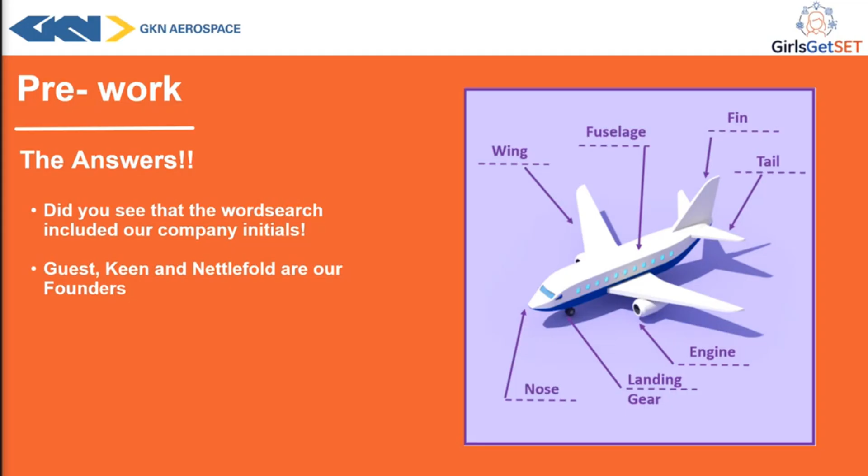So the pre-work, if you did that, there was a little word search and then just some labels to put on the plane. These are the answers, just some very basic breakdown. And in the word search, they included our company's initials. GKN stands for Guest, Keen and Nettlefold, who are our founders.

So we'll go on to what is aerospace engineering. Aerospace links to anything that flies, so this includes aeroplanes, rockets, satellites, and there are loads of different companies building these cool machines to explore the sky and space. Typically, not many people really know who GKN are, but you might have heard of bigger companies like Airbus and Boeing. GKN is just a supplier to them, but there are loads of different companies out there who work towards the same thing of getting power up in the air.

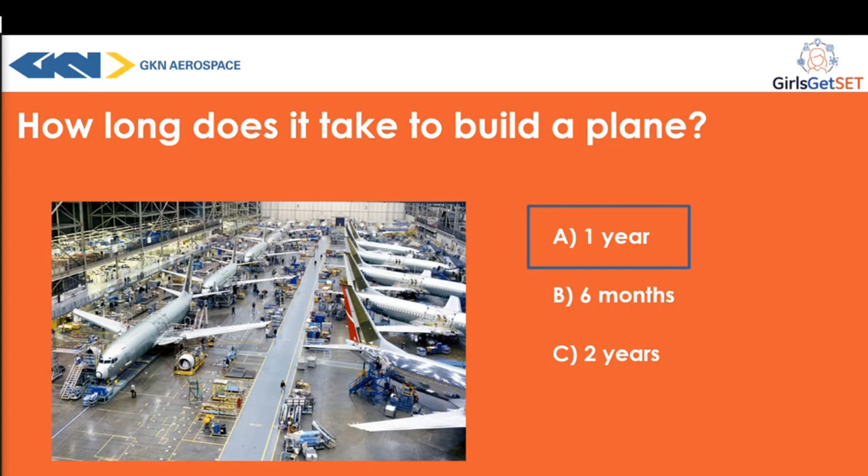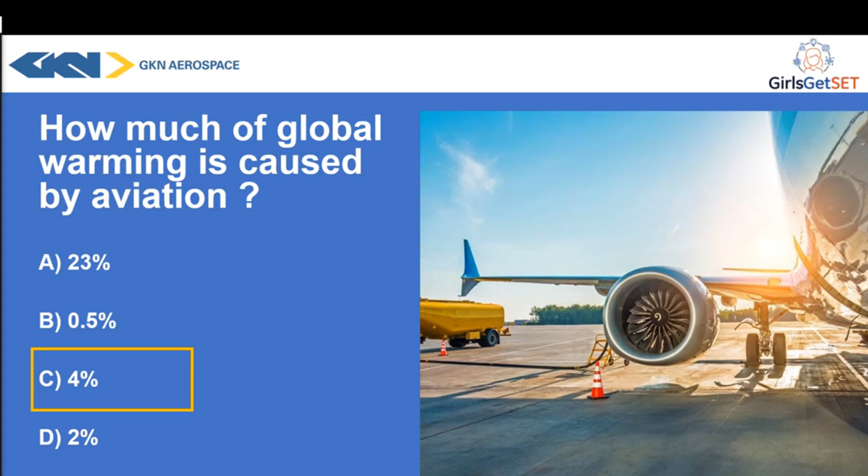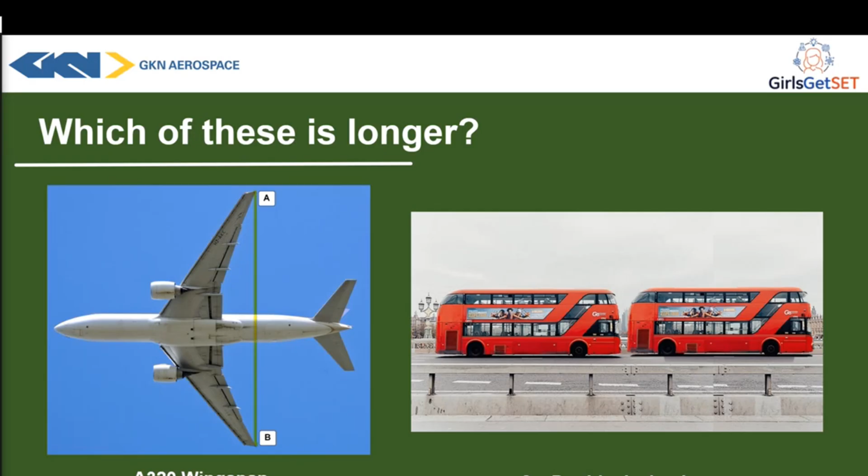Okay, next question: which of these do you think is longer, an A320 wingspan, like a small plane which may take you over to Spain or France on holiday, or two double-decker buses? Most of you are correct, the wingspan is longer by quite a bit. An A320 wingspan is about 34 meters, and two buses vary a little but are about 10 meters less. So it gives you a visual of how big these planes actually are.

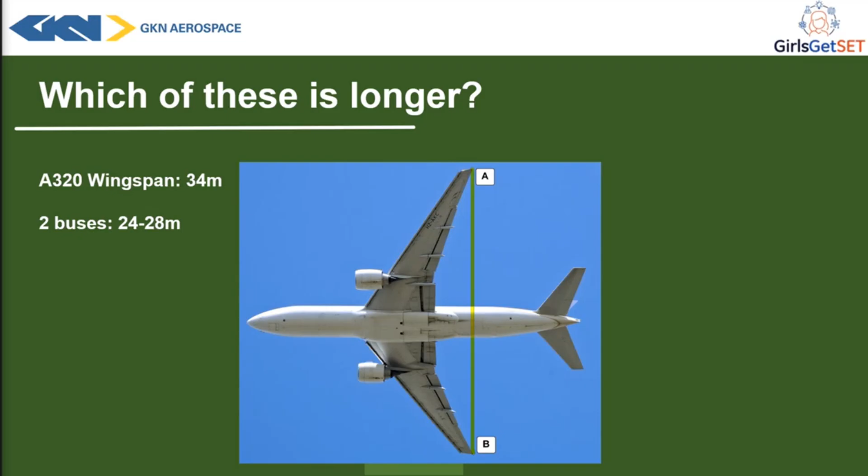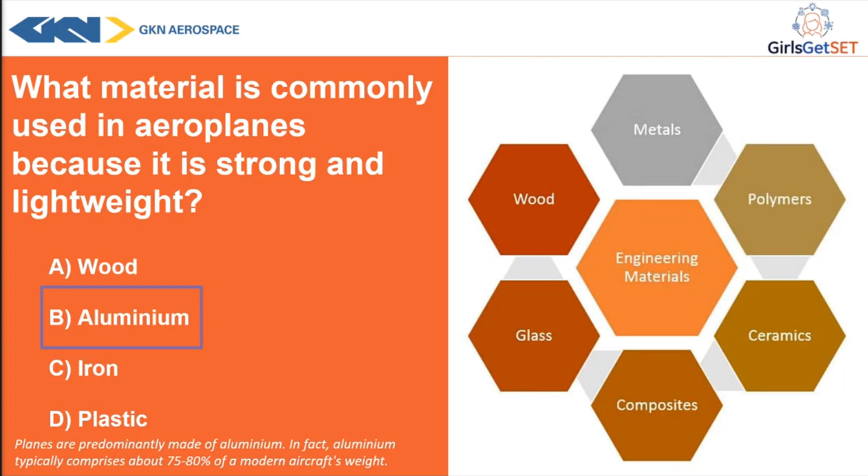So I'm Jen, a project manager here at GKN Aerospace, and I look at our manufacturing and future skills issues within the aerospace industry. One massive problem in the aerospace industry is CO2 emissions. As we all know, aircraft need fuel to fly, but currently these are fossil fuels or oil, which is found deep underground. When we burn this oil, it releases CO2 into the air. This ends up trapping heat, leading to climate change, and that's why scientists and engineers are looking for cleaner ways to fly planes.

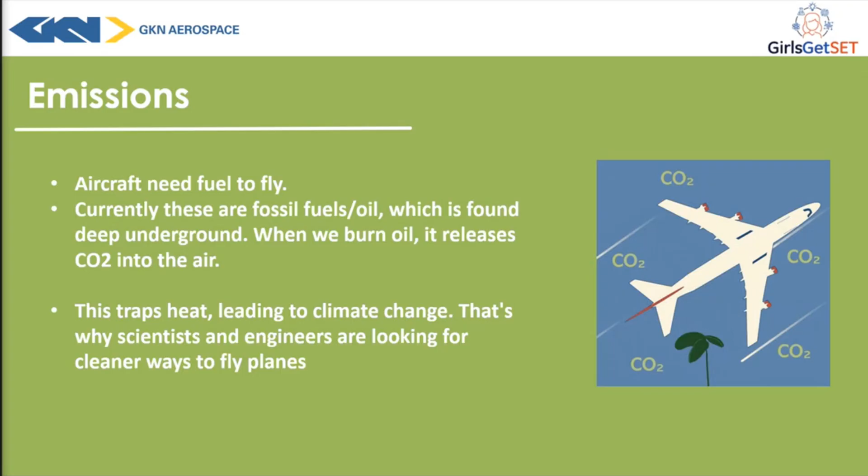So I do have some scary facts for you all about these emissions. 90% of aerospace emissions come from the aircraft still flying today, and one long-haul flight can produce more CO2 than the average person emits in a year. So that's only one holiday someone's taking from London to New York.

Emissions are not just CO2, so there are other harmful gases also contributing to global warming, and we see really bad pollution on these flight paths as well as around airports. Aviation emissions are the fastest growing sector, more than doubling between 1990 and 2019. Finally, since our first plane was built over 100 years ago, that means the planes today definitely need to change.

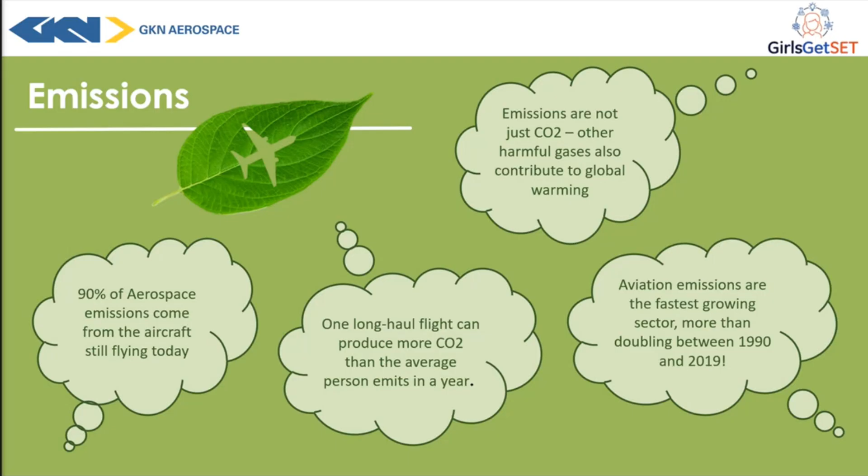So, what changes can we make to decarbonize aviation? We have three main options. The first one being electric, so battery powered, and this is really good for regional flights, flights within the UK. I think our limit for that plane would be to get us to the south of France. So we definitely need to develop more battery power.

Our second option is hydrogen, and this is best for trips like Europe from here. We are still developing that and the infrastructure to support hydrogen flight. Thirdly, there is SAF, which stands for Sustainable Aviation Fuels, likely the best long-term solution for medium to long range flights. In 2023, we actually managed a 100% SAF flight from London to New York, so hopefully we can get to Australia at some point.

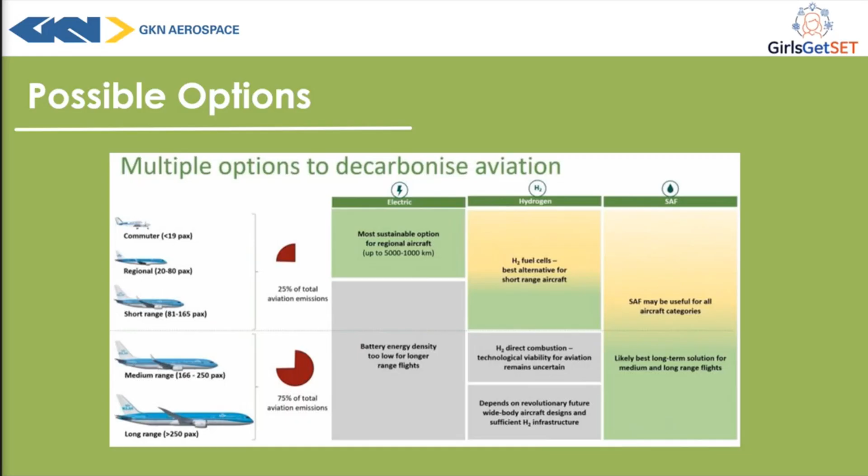Today I'm going to start by talking to you about using electricity as an option for flights in the future, and then later I'll talk to you about some of the projects that we are doing here at GKN.

So to start off, you might have seen that petrol cars that you might drive are now being switched over to electric cars, and you may think to yourself, why is that? Well firstly, electric cars don't burn fuel, the fossil fuels that you just learnt about. They use batteries, which are just like big blocks of metal that store energy, and these batteries are clean energy. They don't release fumes.

And you can get energy from renewable sources like the wind, the sun, or even waves and flowing rivers in stuff like dams. So why don't we apply electricity to planes as well?

Well, firstly, planes need a lot of power to run. To put it into perspective, you would need the same amount of energy as 300 electric cars just to get the plane off the ground.

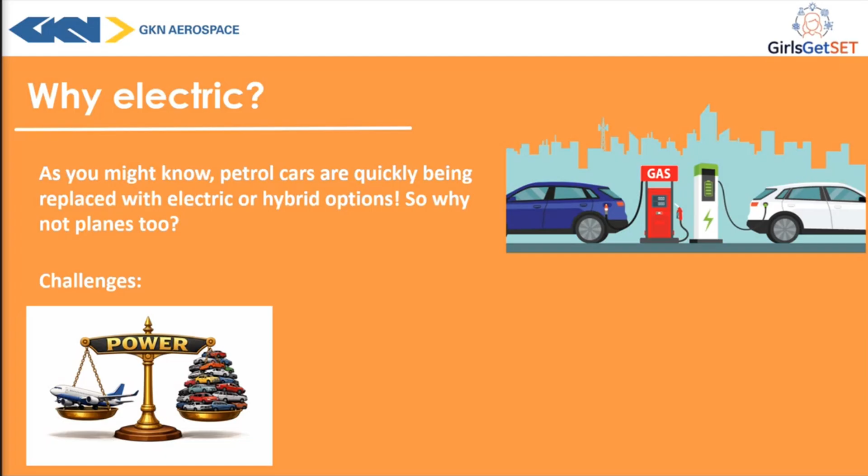Secondly, batteries are really heavy. Batteries are like big blocks of metal, and that's heavier than the fuel they put in cars. So again, if we had a battery big enough to fly a plane, the battery would be heavier than the plane itself, and we simply cannot allow that.

And finally, last but not least, we cannot charge the plane in the sky. Unlike a car where we can just drive to the petrol station and charge it up, unfortunately we can't do that in the air. So the charge that we have in the plane when we take off is the only thing that we have until we land.

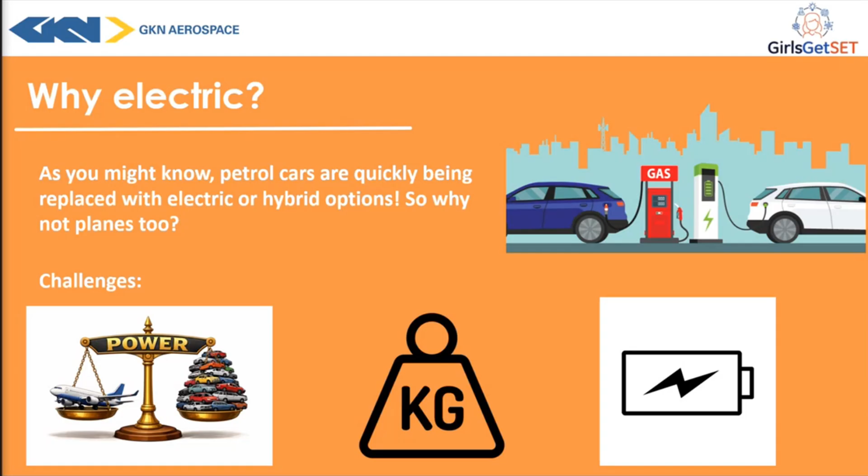So with that being said, what can we do with electricity? Well, we are currently working on something called the eVTOL, which stands for Electrical Vertical Takeoff and Landing. So what that means is, unlike a plane where you have a long runway, we can just take off vertically upwards, just like a helicopter.

And so you might think, why don't we just make electric helicopters? But no, these are different to helicopters for different reasons. For one, they are much quieter than helicopters, and if we're going to use them in urban cities, we want to reduce the amount of noise that these are producing.

Secondly, we are using electricity instead of fuel that helicopters use. Again, cleaner and not producing CO2 that will lead to climate change. Thirdly, they are going to be cheaper to use once they get into service, as the amount of electricity you need will be cheaper than the amount of gas you need to use.

And finally, and I think most importantly, is that these will be safer than helicopters. They will have backup systems, which we call redundancy in aerospace. So if something goes wrong, we will have a backup to ensure that we do not crash, simply put.

So where could we see these electrical vertical takeoff and landing vehicles? Well, the most convenient one is to fly over traffic, otherwise called flying taxis. This reduces the amount of cars in high traffic areas by having a flying taxi to go over them instead.

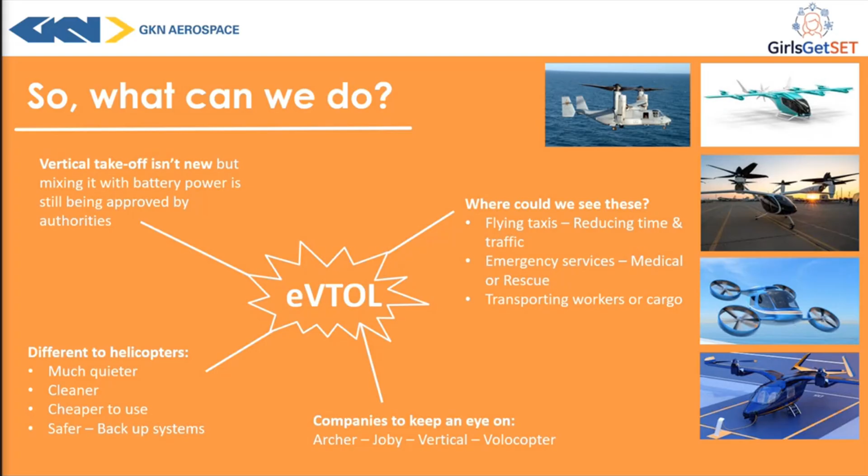So before we move on, let's just have a look at some of the pros and cons of electric aircrafts in the future. So like I said, they will not need fossil fuels, and they will not produce much CO2. Secondly, we could reduce our commute time.

So if we were going to go from an airport to another part of the city, it would take much quicker than it would if you were going to go in a normal taxi. We may see these electrical vertical takeoff and landings this year, and they're expected to be normalized before the end of the decade.

And then batteries, although they're heavy now, they are getting better and they can store more charge for a lighter weight. However, the technology is still developing, so we are working really hard to push this forward.

And like I said, it needs a lot of charge, and we can't charge it midair, so this is not going to be suitable for a long-haul flight. And then we're going to need to find new charging stations and areas so we can land these vehicles.

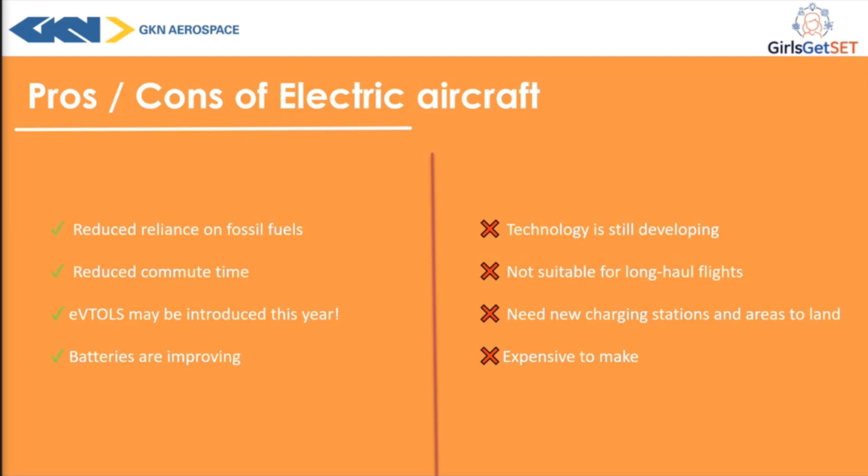Okay, so the next couple of slides are going to be based on hydrogen power. So you might have heard this in the news, how there's lots of new sustainable goals to get hydrogen electric hybrids out there. So I'm just going to go into a bit more how they kind of work and are they feasible. So we're going to start with what actually is hydrogen.

So hydrogen is the very first element on the periodic table, and it is the most abundant element in the universe. It is the fuel of stars. So every star is made of hydrogen, and then they all collide together to make every other element basically.

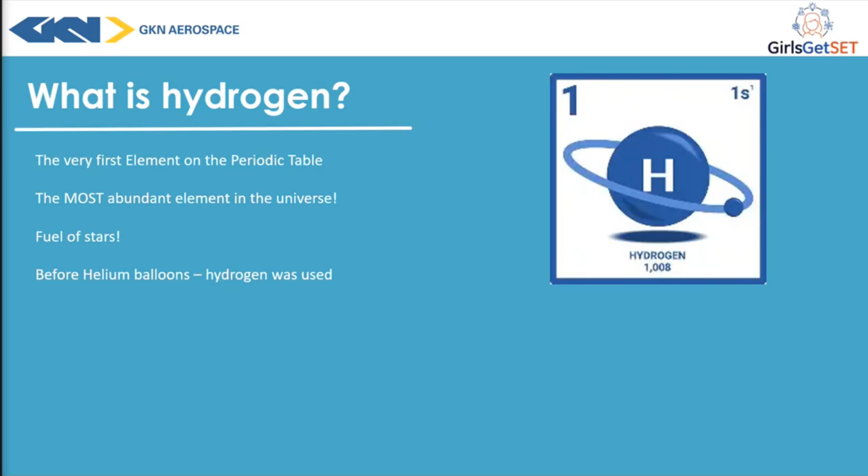And before helium balloons, hydrogen was actually used because it's so small and light. It only has 1 electron and 1 proton and no neutron, if anyone is into chemistry. So it is the very smallest element, and it's basically just everywhere.

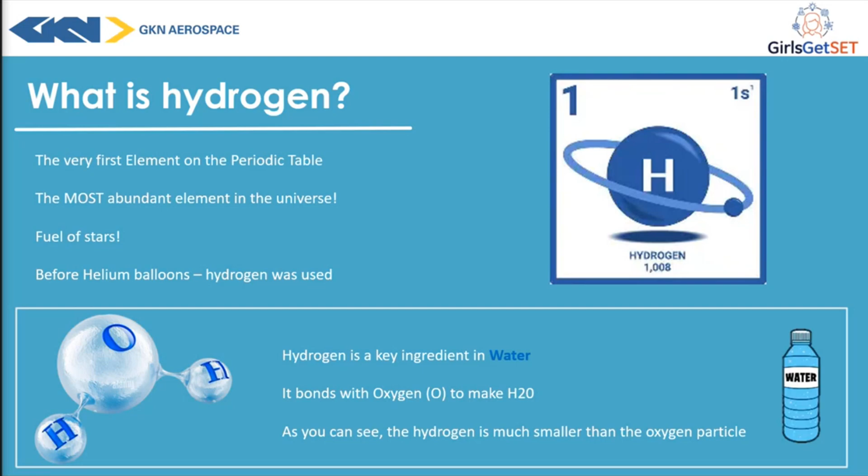But yeah, this bonding with oxygen is going to be key in part of our fuel cell technology, which we have some projects here in GKN, but Airbus also has some leading projects to get these working. So we're going to look at how we can now use that water in a fuel cell aircraft.

As we said before, renewable energy can be used to create electricity, and then we can use that electricity to split that water atom up into the hydrogen and oxygen through a process called electrolysis. I'm not sure if anyone's done this in their chemistry lessons yet. It's basically using electricity to split the positive and negative parts of the atom.

So then when you've got the hydrogen, it's made really, really cold, so it turns to a liquid. It's like how the boiling point of water is 100 degrees, that's when it turns from liquid to air. But for hydrogen, that's at negative 253 degrees, which is mega, mega cold.

So you keep it really, really cold, and then on the airplane, it still needs to stay cold. So there needs to be lots of systems involved for that. And then the fuel cells can convert this hydrogen back to electricity by fusing it again with the oxygen. And the only byproduct of that is water. And then the energy created can drive those motors and propellers and all of that. So it's basically the process of splitting a water atom and then putting it back together on the plane.

Obviously, there's going to be some downsides with this, as keeping something at negative 250 degrees Celsius is kind of hard. It's a lot of work, and there's lots of different things which need to be considered, like how are you going to move it around so cold? How are we going to keep it cold? So those kinds of issues is actually what I do in work. I'm currently in the cryogenic team here. So it's exciting things, but there are going to be lots of challenges.

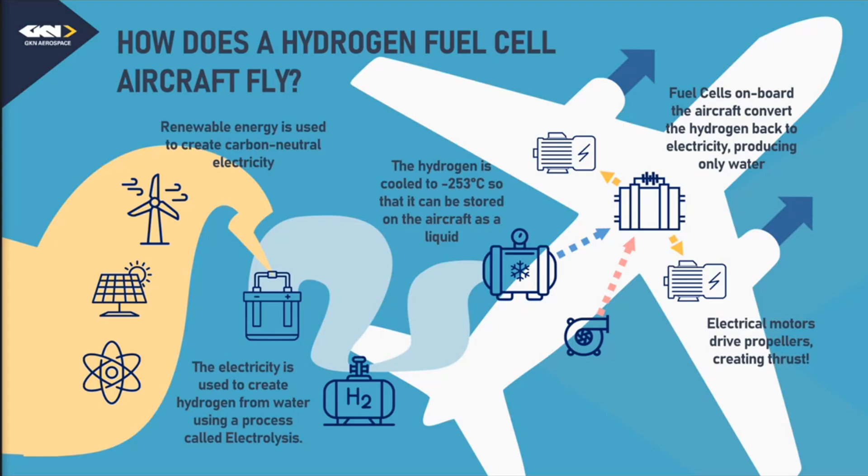So again, there's another pros and cons list of these hydrogen fuel cells. So yes, there's no reliance on fossil fuels, and you don't need to recharge in the air because you can just take your water and split it and put it back together. As I said, the only byproducts are water, heat, and electricity. So there's no emissions from that, no CO2 made.

And I think the most realistic outcome is it's going to be made into a hybrid plane. So like how you have hybrid cars, which are both electricity and petrol, it might be a hybrid electric. So the power made from the hydrogen goes into a battery, if that makes sense. But it's also very developing and won't be here for quite a while, so it may not be ready until 2050.

So recently our emission goals were pushed back a little bit because the technology is still developing and there's other options which everyone's looking into. So it is a bit slow.

The storage can also be dangerous. So with those low temperatures and things, if you quickly heat it up, hydrogen expands loads. So there's issues with, could it explode? Obviously, there'll be loads of safety measures involved, but there are steps which need to be taken to certify that.

So there's lots of work behind the scenes here in GKN as well. And it might not be as efficient as a standard battery. So the fuel cells which put it back together and create that electricity again aren't quite as good as just taking a battery with you. So there's lots of kind of compromises which need to be made when looking into hydrogen propulsion.

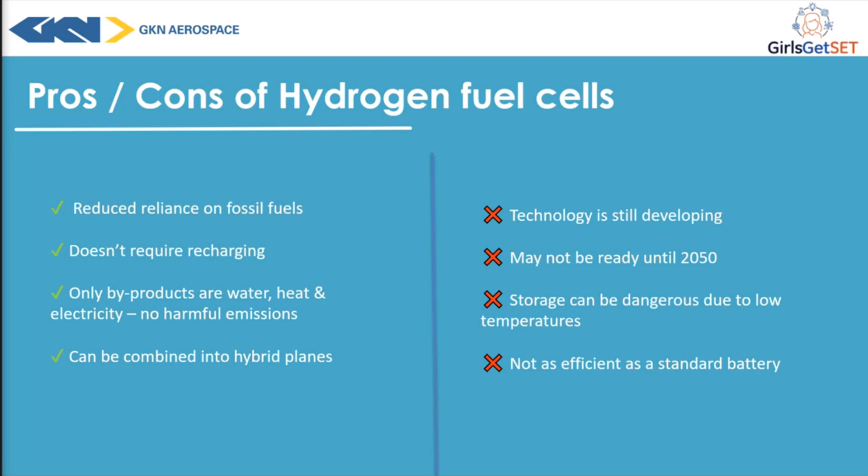But I think it's definitely an option for the future for those kind of mid-range flights. I'll hand you back over to Jen now.

Yep, so I'm here to talk about SAF.

So, aviation biofuel is a type of fuel made from plants and other natural materials. It's different from fossil fuels because imagine using plants that grow above the ground instead of oil from deep below that take millions of years to form and you need to dig for it. So this fuel can be mixed with traditional jet fuel, and this is what's called sustainable aviation fuel, or SAF.

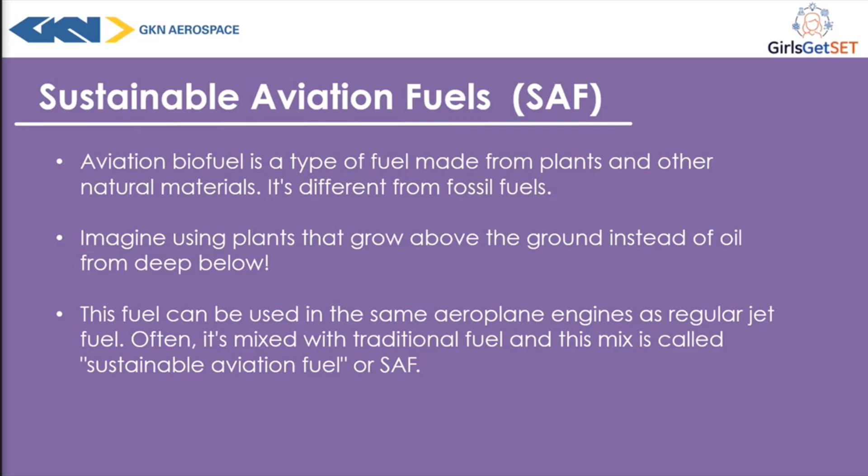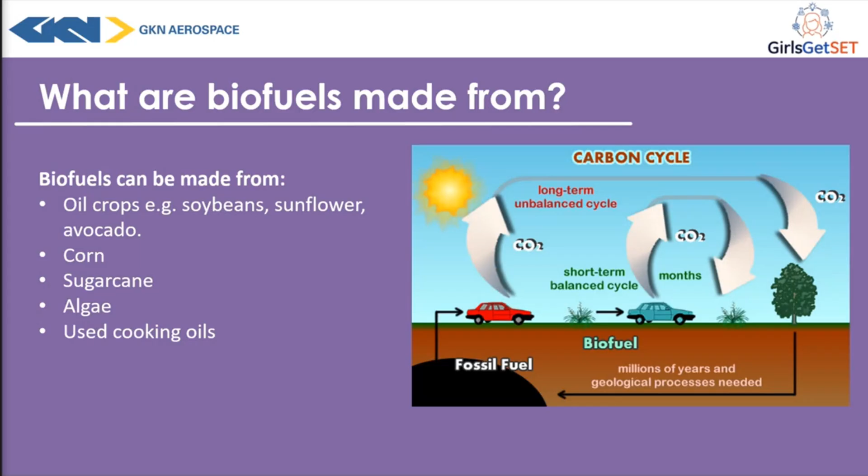So the pros are, of course, it's renewable. We can regrow crops - we cannot make fossil fuels as quick as we're using them. There is cleaner air. By airports, the air is really dirty, but using biofuels means cleaner air from flight. And there is a big reduction in CO2.

However, we are still developing SAF, so the cost of it is actually 3 times the amount of jet fuel. And this is because it's really hard to scale it up. And the land we're using is currently for growing crops that we need to eat, so there's a lot of competition with food crops.

How do we convince them that we need to grow biofuel? So from 2025, the government has made us use at least 2% of SAF in all aviation fuel from the UK, and this is going to keep going up. So we do need to figure out how to use up our land better.

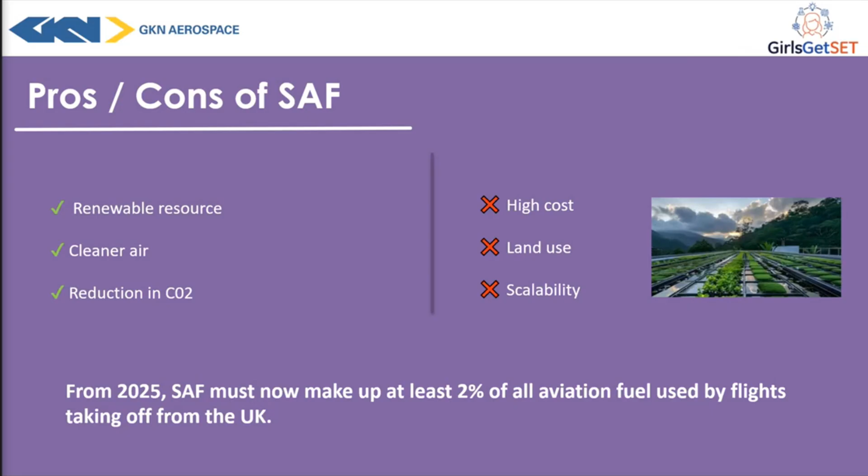Quick question. How much SAF in fuel mix does Airbus want to use by 2030? Is it A, 100%, B, 5%, C, 50%, or D, 30%?

We're getting a real big mix of answers - with B, D, and C.

Could we get the answers, Maddie? Yep, it's D, 30%.

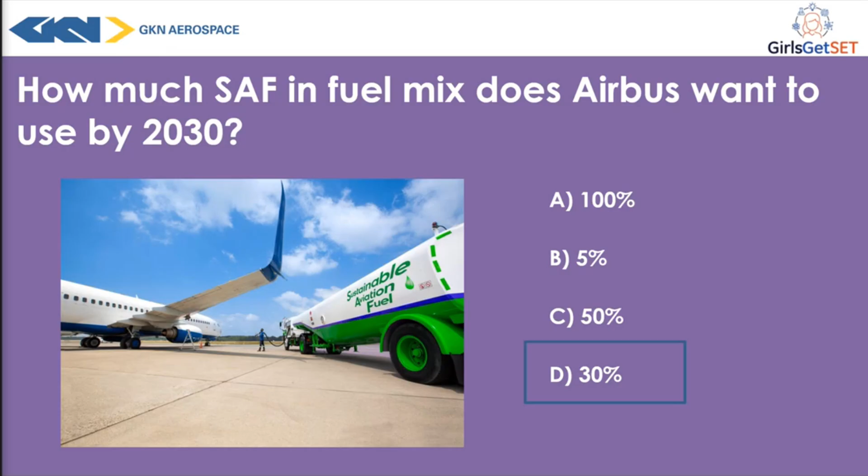Okay, so now I'm going to take you through some of the projects that we're doing here and some of the projects that I'm doing as well in my team. So we'll start off.

Aluminium, as Maddie said, is used the most in aircrafts, and a big challenge is recycling it. Not actually recycling it in the sense of you recycle it at home, because we actually do recycle our aluminium at the moment, and it goes down into our Coke cans, our Pepsi cans, but it isn't valuable to just keep recycling material down to Coke cans. We want to recycle it back to the aluminium that we use in aircraft.

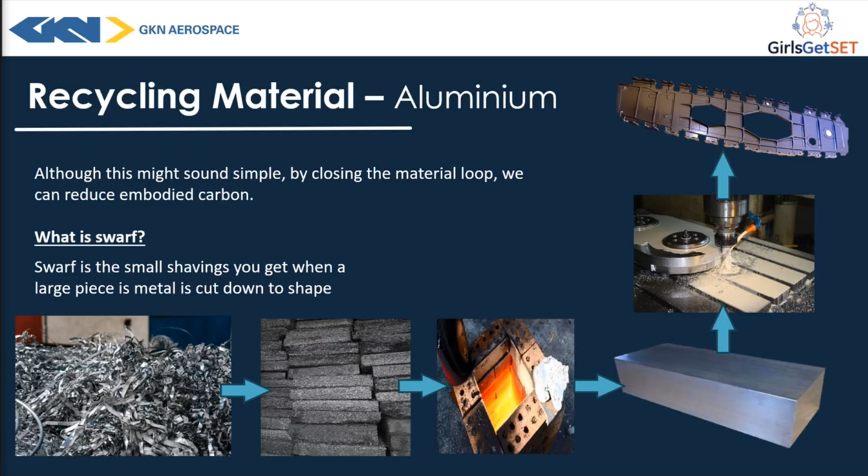Okay, so composites. I'm going to do a little demonstration here to teach you what composites are, because it is a complicated material. So what are they? We have two materials which combine together to get an even stronger material than before.

These two materials are what you'd call a fiber, which is like a long strand here - I've got a piece of spaghetti, I hope you can see. So it's a long strand, and if I bend it, it will break. But if I have multiple of them, they're going to be harder to break. However, the issue with this is that if I drop it, then they're all just going to fall apart.

So we also need what we call the matrix, which is just a fancy word for the glue. Here I've got some - hope you can see that - this is some honey, which we could use as the glue to put our spaghetti together. So overnight I've done exactly that, and now I've got a nice thick block of spaghetti that is together, and that's not breaking.

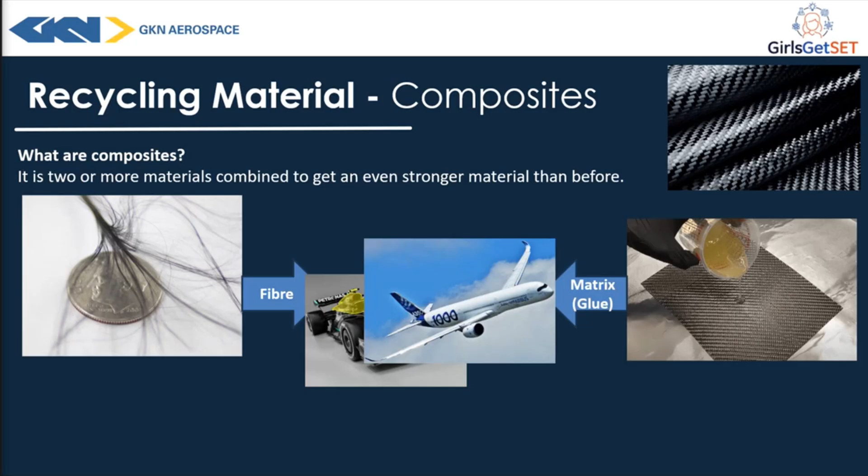And so if we combine them together and put them in an oven to cure them, which basically solidifies it, we can get some stuff like F1 car parts, parts for aircrafts, and finally even parts of spacecrafts. There are many other things, but that's just some examples.

Okay, so why are they hard to recycle? Well, if I want to get from this composite back to the spaghetti and the honey, it's going to be hard to pull apart, hard to separate. So we could melt it like we do with metals. However, if I try to melt a composite, due to the nature of it, it will just burn, and we can't do that. So there are engineers that have figured out ways to separate it, but they're very special machines and they cost a lot of money.

However, we are working on better ways to recycle them, and as part of my project, we are finding out how we can separate the material and reuse it again into aerospace parts.

So why can't we just recycle all materials? Well, like I said, the aerospace parts have very high specifications, which basically means that they need to be really strong and really trustworthy to be accepted to go on an aircraft. And so this reinforces how safe our aircrafts are, because we cannot allow material that is substandard to go and fly into the air.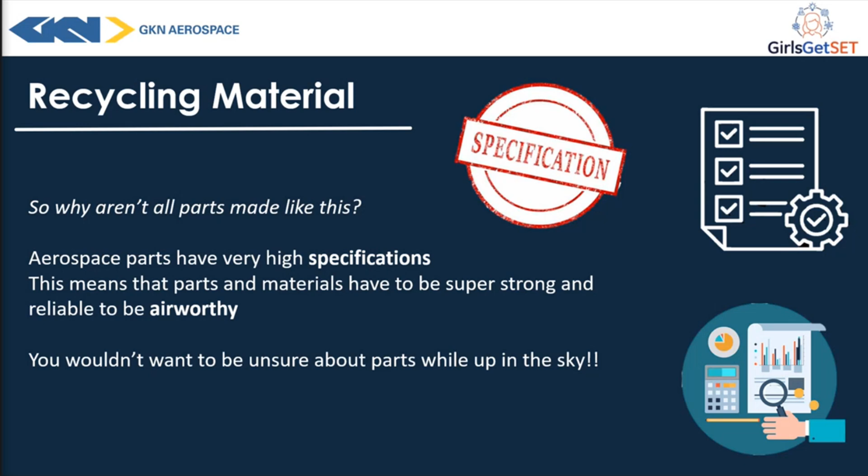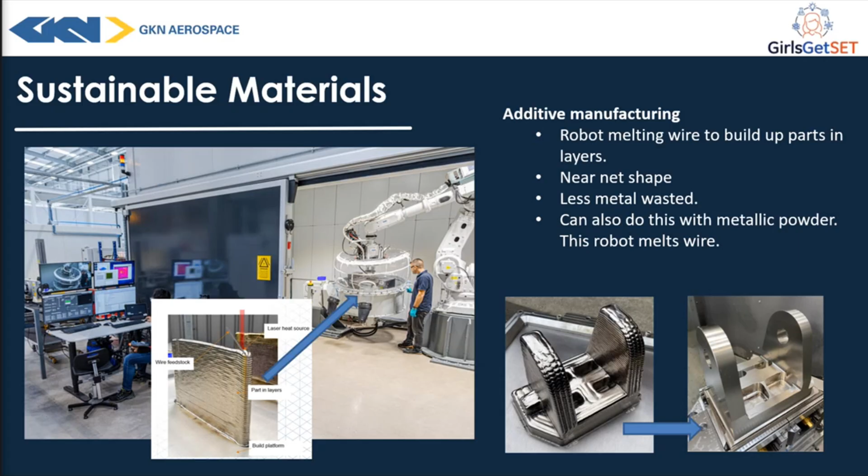So imagine you have a plate here, and we have a big robot arm that would put molten metal onto it, onto a path, and lay it up like you would lay icing on a cake. In the bottom left here, you can see a wall has been created by the robot arm, pouring molten metal on it again and again. And if we do that into a shape, as you can see on the right, we can actually make shapes, and once we machine them down, we've practically made a shape using almost all the material that we've used. So that is really efficient, and that will allow us to reduce our costs and reduce our emissions.

Okay, and then finally, this is something that we can all do, but this is also what we do in the industry. So imagine you have your oven at home, your light switch at home, and sometimes you might forget to turn it off when you leave the room. And so you're wasting energy because you're not using the light in the room. However, what we've done is that if we have a big sticker next to a light switch or an oven or a machine that just says, when you're not using it, please turn it off, it might seem simple, but it actually does a really effective job at telling people to turn stuff off and save energy.

So when we implemented it last year, we actually saved nearly 30,000 kilograms of CO2 per year. And that amount of energy, you could drive your car around the world 4 times. So that shows that something that's just small, like putting stickers next to machines and stuff, can actually make a massive difference.

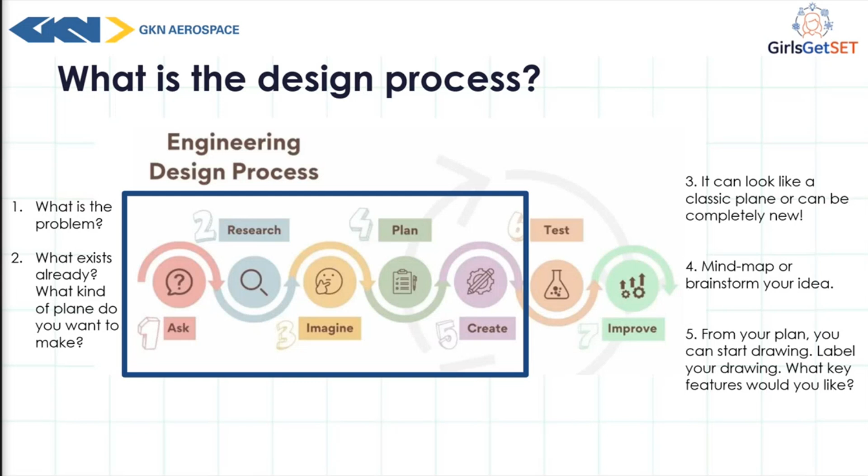So then you've got to kind of think up the design. Is it going to look like a classic plane, or is it going to be something completely new? And then kind of mind map or brainstorm, and then you can just start creating. So making a drawing or a poster, kind of explaining everything. These are some very, very quick example sketches.

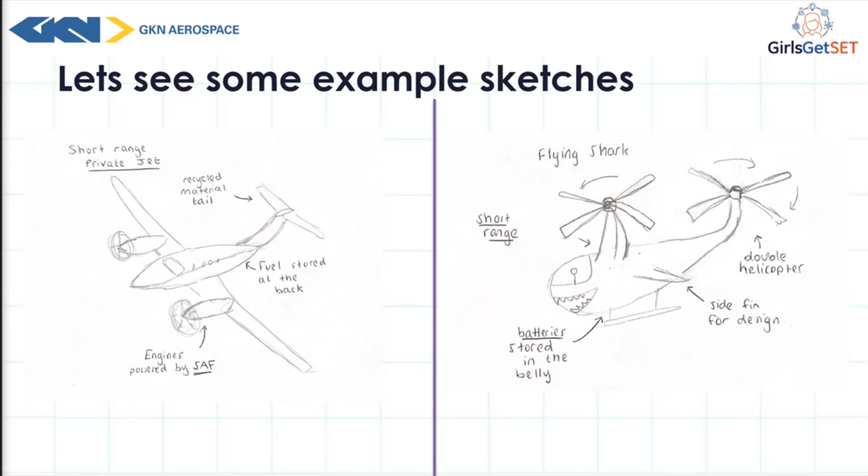So these designs can be whatever you want. Go absolutely mental, it's okay. So these are the kind of things which I want you to consider.

So kind of what power is it going to use? Who's going to use it? How many people can it carry? Is it going to be a really big plane that can carry like 200 people over to Asia? Or is it going to be a little air taxi that can just take up to 10 people from inner London to outer London?

What is it going to look like? How big is it? And what materials is it going to be made from? So these are key design things which you must consider, like materials especially. You can't have it all made of really heavy iron. Is it going to be aluminium or maybe composites like James explained?

Where are all the batteries going to be stored? Is it going to be in the back, in the front? It depends how you're going to do it, where you're going to store your water or your batteries. How is it going to stay in the air? Is it going to have wings? Or maybe going to look more like a helicopter with propellers?

When is it going to be built for? Is it going to be for this year? Is it going to be simple, just a small battery? Is it going to be super futuristic, for 2050? So if you're going to choose hydrogen, you know that's not really ready yet, whereas a battery may be more feasible in the next few years.

And again, if it goes wrong, you can start again. Engineers always make small and big changes all the time. As I said before, it is a design cycle. So you can kind of do whatever you'd like.